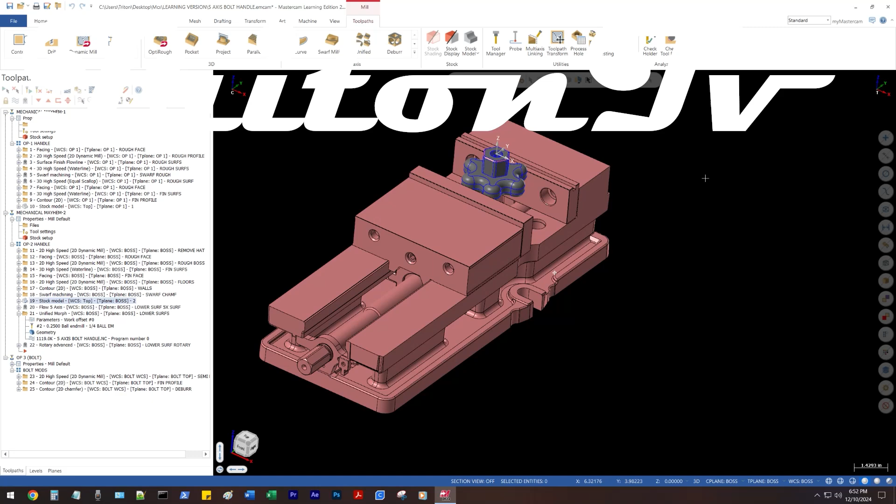Today we are going to be looking at this toolpath right here called Unified Morph. It's quickly becoming one of my favorite multi-axis toolpaths. I want to talk about the setup we have here, some of the settings in the toolpath, and the cool things about this toolpath.

I'm just going to go ahead and play it in backplot. In my last Mastercam video, I didn't say anything, I just did some video, but we'll go ahead and start the sim as well. So I'll start backplot here, and we'll cycle through once, come down, cycle through. I changed a few settings since I recorded that, so there's a setting in here I'll play through and we'll check it out. It's a really cool toolpath.

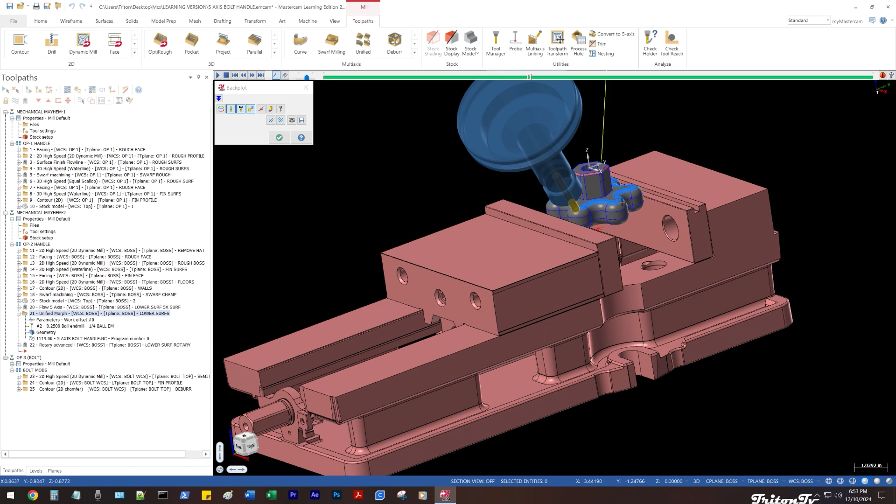In this instance, I'm tilting away from the wall, and I'll show you exactly how I did that. We're also avoiding the vise here, but I noticed that I needed to move the vise down 15 thou in order to correlate with how the part would actually be inside the vise. I'll show you those numbers here in a second.

Let's toolpath finish. So you can see a nice smooth motion coming from the top to bottom. You could argue starting on the bottom is better. This would just be the finishing of those fillets, and this material would be aluminum, so I'm not really worried about quote unquote cutting on the tip.

One thing I'll show you real quick, if we analyze from the bottom of the vise here up to the top, you'll see 1.735. I'll pull up my calculator and type in that number, 1.735 minus 1.625, which is 1 5/8 parallels.

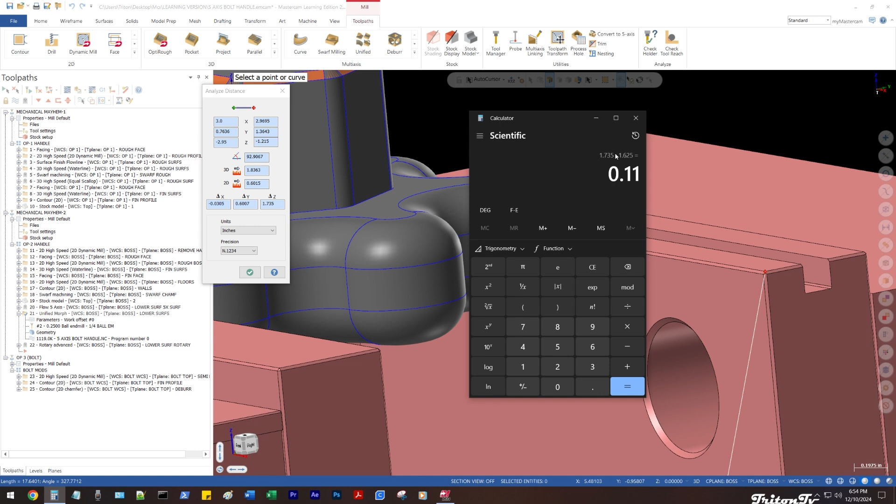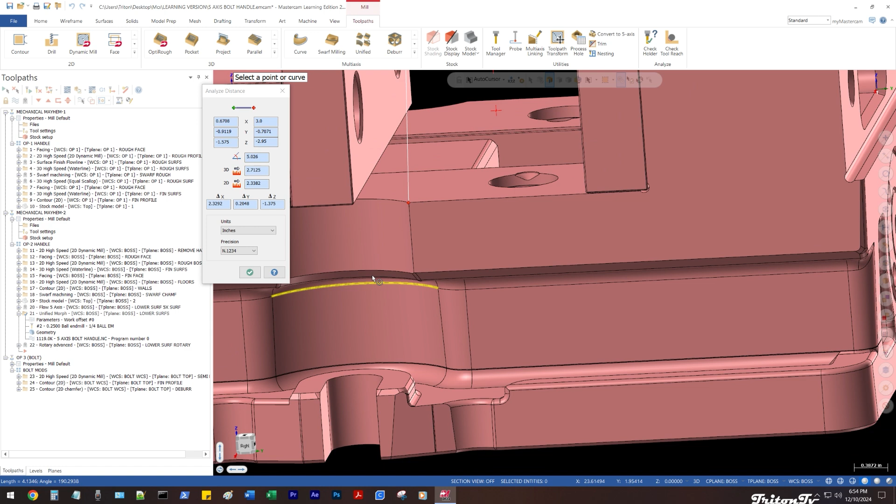We'd be holding onto 110 thou. So if I look at the bottom of the part to the top, I know there's a chamfer, but look at that. Hold on a second here, I'm confusing myself with these numbers. So we needed to measure from here to here. Oh, I think I might have been dyslexic. You get the point.

1.375. Why am I getting confused here? We need to measure from here to there, 1.735. And I think, yeah, okay, I subtracted the wrong number. 1.735. Since we have a 1/4 inch radius, I believe I picked the size that would be, quote unquote, if this was square edges, 3/8 of an inch holding onto the part.

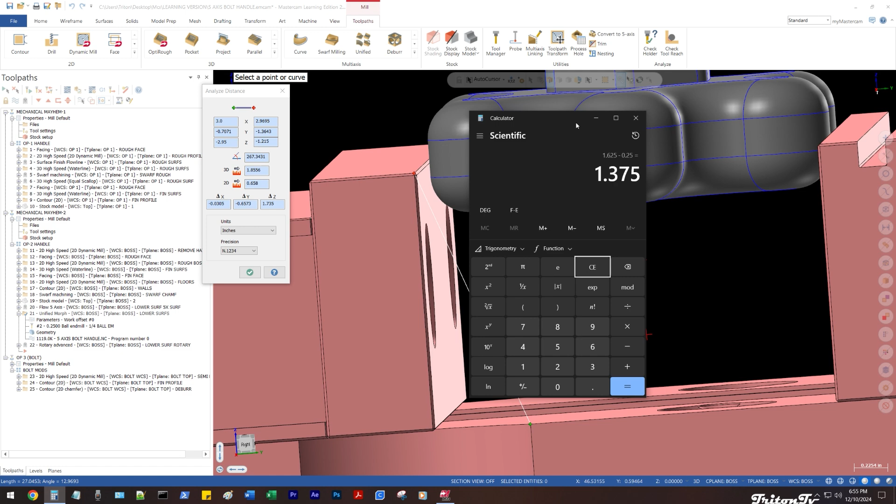So 1 5/8 would be 1/8 of an inch holding onto the part. We need a 1/4 inch shorter than that. So let's just type that in, 1.625 minus 250. 1 and 3/8 would be the size of parallels that we would be using, which would leave us holding onto roughly 360.

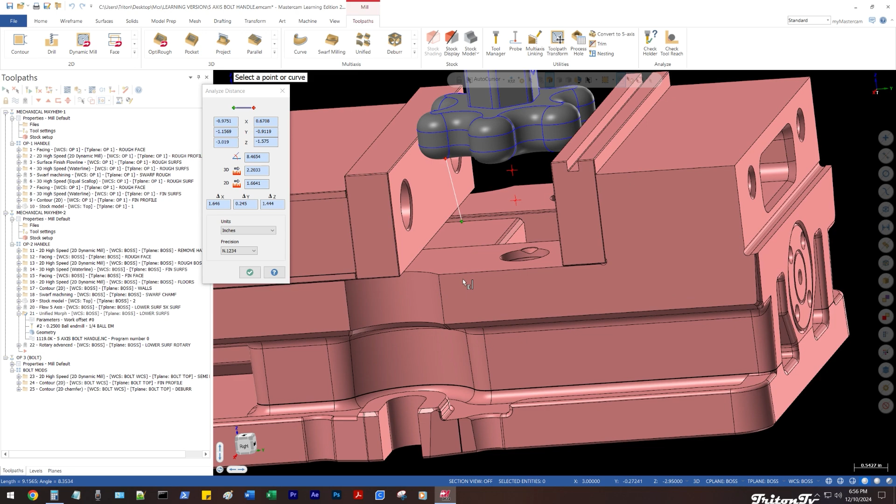And like I said, so if we come down here, measure up here. Oh, measured from the wrong spot. This is turning into a disaster. Yeah, so 1.375 would be the size of the parallels, and that would get us roughly 110 thou. That's the number I was getting. 110 thou of the part where these two tangencies of these arcs, which are in line, would be below the vise. And before that was 15 thou taller or something like that. Didn't mean to spend that much time on that.

But anyway, this is the setup of the part. I moved it down. I noticed in the last video I was only 10 thou away from the vise. It's supposed to be about 20, 25 or whatever.

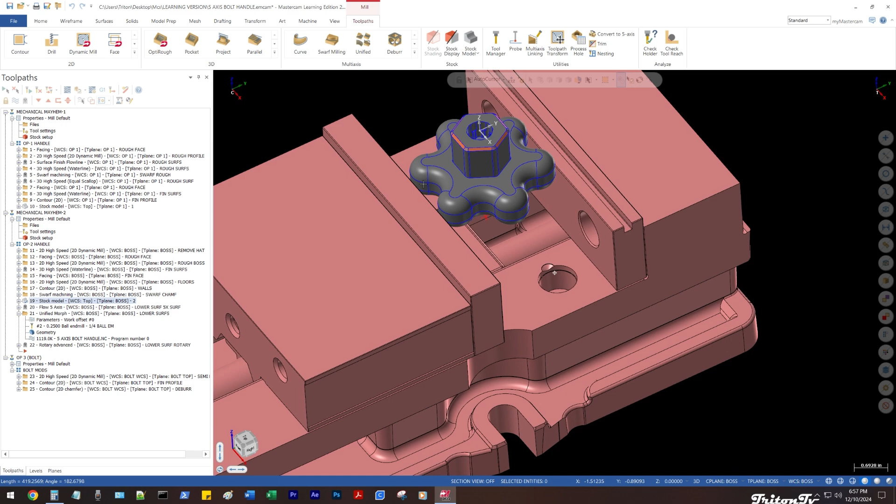So one thing I'll talk about is I made a stock model that takes into account this stock model as the starting condition, and then these toolpaths minus that guy would be what this stock model was made to. It starts here, runs all these toolpaths, and then I have my toolpath display off by default. I don't like seeing the toolpaths unless I'm running backplot. I know that's blasphemy, but that's just the way I like it.

So I will go ahead and push Control T, which does different things depending on if you're in the graphics window or if you're in here in the toolpath manager in your operations. So if I have an operation selected and my mouse is somewhere in the toolpath manager, if I push Control T, it's going to... I think I need to have this on.

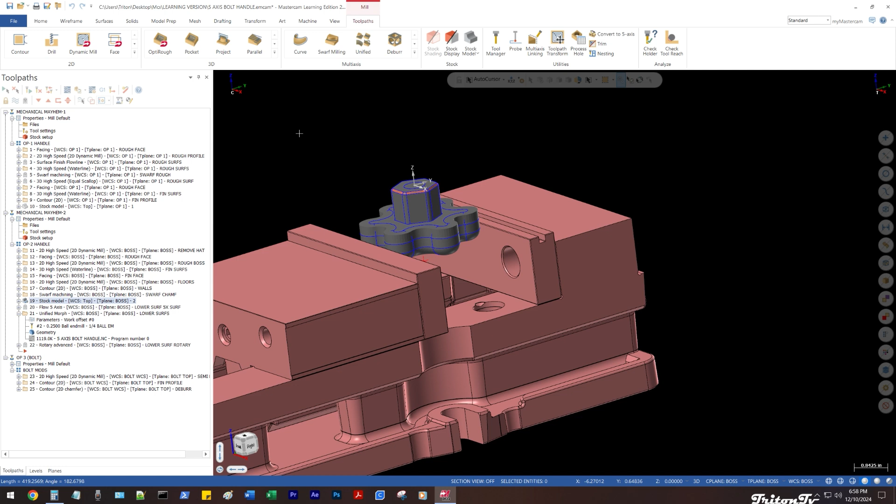So it's going to display the toolpaths. There's also Alt T out in the graphics window, which will turn that on or off. However, since this is restricted to only that one, it's only going to show that. So if I push Control T here to turn that off, Alt T up here... of course it acts funny, this has always been kind of bugged. Whatever, you get the point. This gray thing here is the stock model after all of these. Oh, there we go, that's why it's doing that. That makes sense, I'm not used to having this setting on. I hate toolpaths. There we go.

So now we have restrict display only selected toolpaths on, and then when I click on a thing, it'll show the toolpath. I don't like that, so I come out here and push Alt T, but when I click on the stock model, for some reason that's the one toolpath that will still display with Alt T. It's such a weird modality between toolpaths being on and off. I guess stock models have a high priority. Sorry to go off on all these tangents. Anyway, that is the condition that I start with this toolpath. So I'm going to go ahead and turn this off again by pushing Control T.

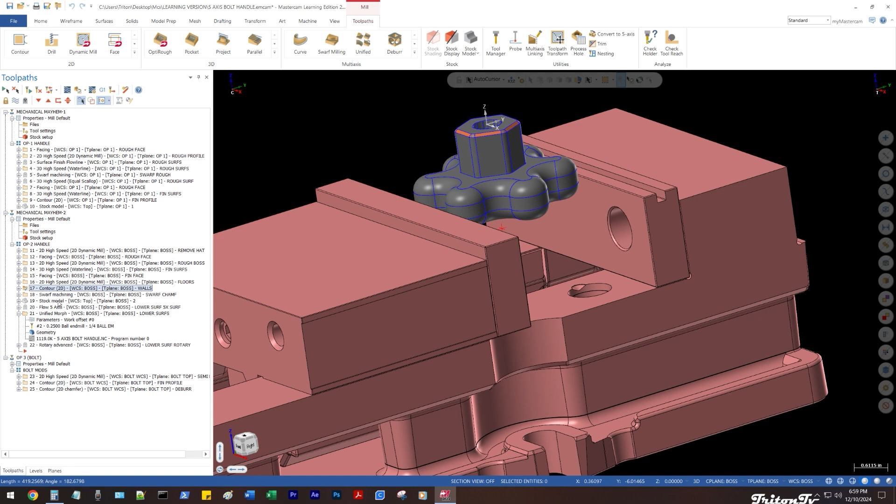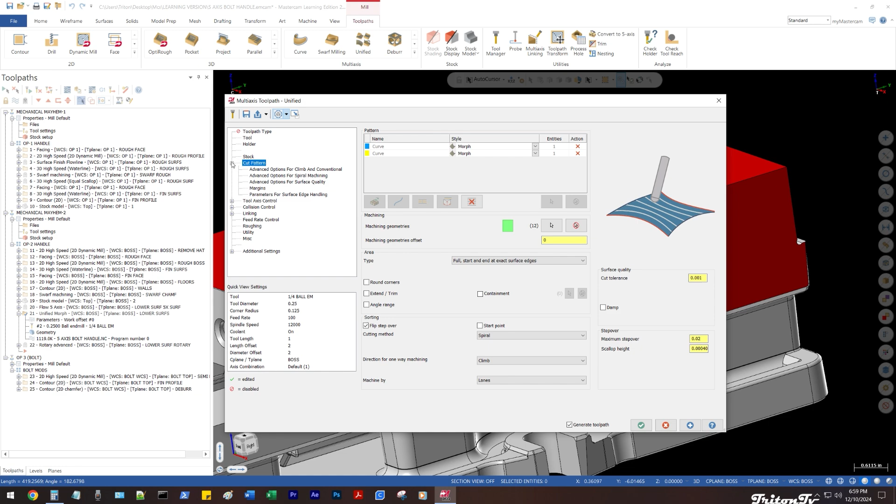And also when I click on toolpaths, they're gone. So if we go into the Unified Morph toolpath and we click on the parameters, I'm going to show you. So we have our tool selected, our speeds and feeds, blah blah blah, comment. I have a holder with a certain stick out. This is actually, I just picked a holder. This holder actually looks like it's too big for this machine that I have selected, but whatever, I don't care about that. So I'll go ahead and scoot this over up in the corner here.

I'll zoom out a little, and you can kind of see any multi-axis toolpath or some 3D toolpaths will color code things once you're in the geometry menu. So we'll make note of a few things. The machining geometries I picked, I just wanted these surfaces down here, so I went ahead and picked those. And I gave it morph curves.

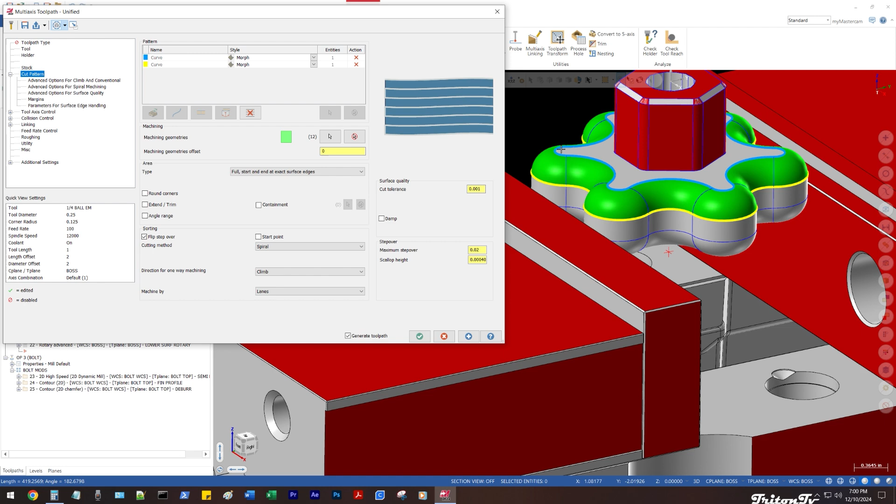If you're unfamiliar with what morph curve actually means, there's this mysticism around it, but it basically just means you're taking the toolpath and starting with, in this instance, the blue curve, and ending with the yellow curve. You are morphing how the tool goes along your machining geometries, or drive surfaces as a lot of the surfacing toolpaths call it. You're morphing the toolpath from here down to there, taking this curve and eventually ending up with that curve. So from the top, what you end up with is a nice toolpath that blends in with the shape of the top curve and the bottom, which is basically what Morph toolpath does.

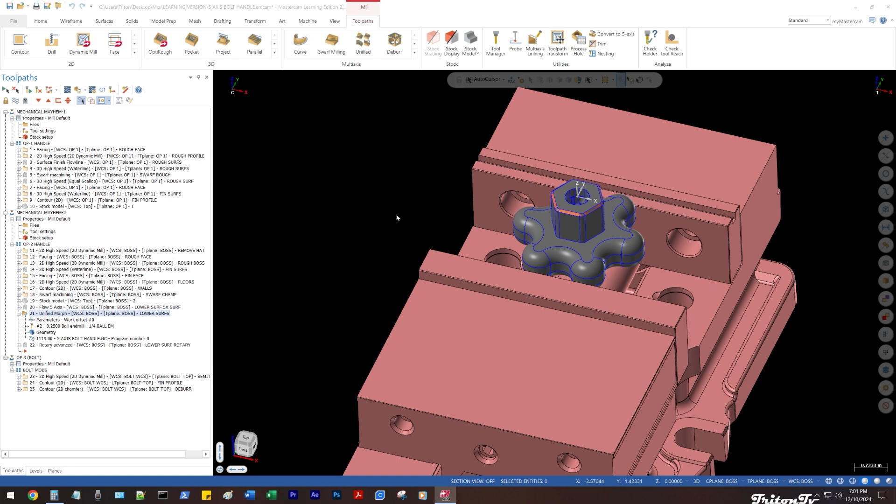So anyway, I'll turn the holder back on. We'll go back into the parameters here. So as you can see, we'll go back to the cut pattern, so we have our geometry here, and then there's a few settings on here. We're just doing a spiral, which will get you a nice smooth toolpath, as long as you get everything right and it's reading the surface well, it should get you nice smooth motion. What is the other toolpath? Waterline will also do that, and equal scallop if you get everything right.

Sometimes surfaces and solids get weird. So anyway, this is the default, I think. NX calls this in-tol and out-tol. This is basically a profile, if you will, of 1 thou which is what the tool is allowed to follow on this surface, and I think I gave it a step over of 20. I played around with the step over. I like these toolpaths because they update live, so if you enter 25, it updates the scallop, which is pretty cool. That's a relationship between the step over and the radius of the tool. So anyway, we're gonna have a 4/10 scallop, we're doing spiral, and then now we'll get into some of the funner stuff. So let's see here.

This is the setting that I changed to get the tool to actually do climb cutting all the way around the part. Depending on how it reads the surface and the concavity and convexity, it'll generate a toolpath in a direction, and if you turn this on, it'll actually look at where the tool is contacting the part and what direction it needs to move in order to be climb cutting or conventional cutting, depending on what you told it here. So I told it climb cutting here.

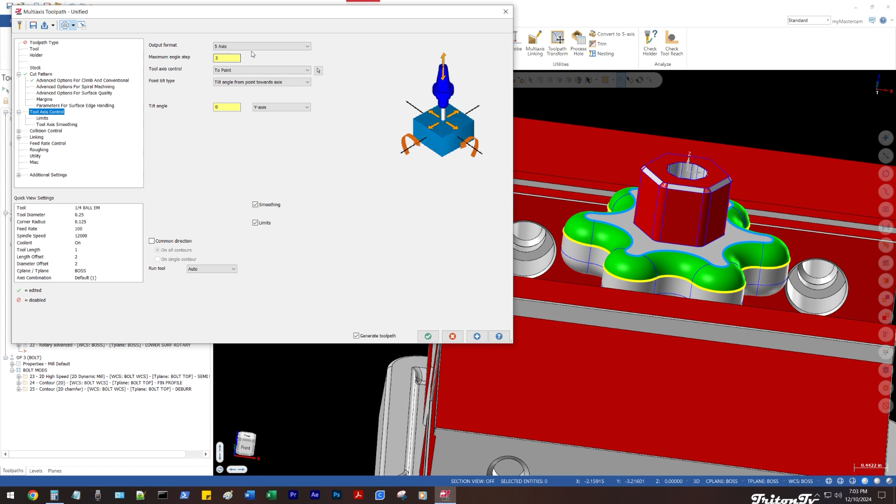So we're outputting 5-axis movements. Angle step is 3, meaning the max change between motions would be 3 degrees. And this is the kicker here: tool axis control. There's tons of settings here.

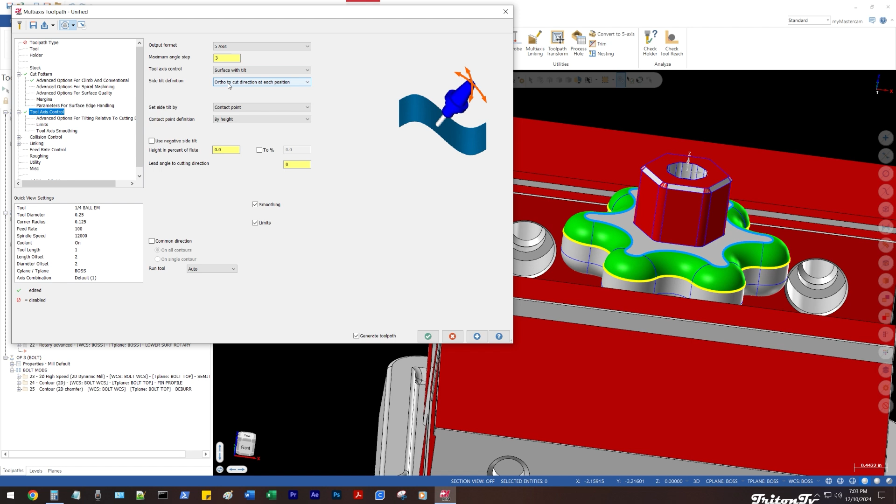Surface is kind of like normal to a surface at the point at which it's at. Surface with tilt, you can give it tilt. Angle towards tilt axis, you can give it an angle and tell which axis to tilt towards, depending on if you're on an A axis or B axis machine. That would make sense there.

Fixed angle to axis, I don't know if I've messed with that one, but the one that we used, I'm going to exit out and come back in just so I haven't changed anything. The one that we used is To Point. So To Point is a really cool setting. To and from are pretty cool. So as you can see by the graphics here,

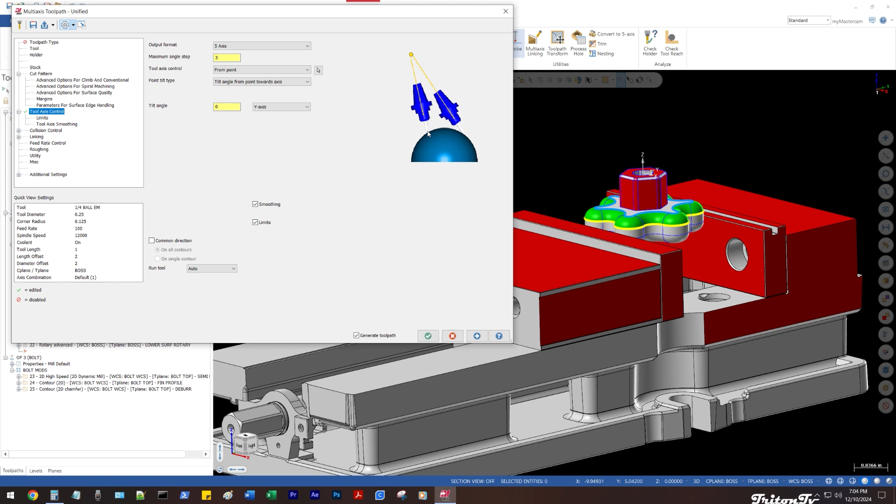the spindle orientation will be pointed straight at the point when you're going to point. From point is the exact opposite, right? You are the top of the spindle is pointing up towards. So in order to get what you want on that one, let me think about this. I don't know if you can get it.

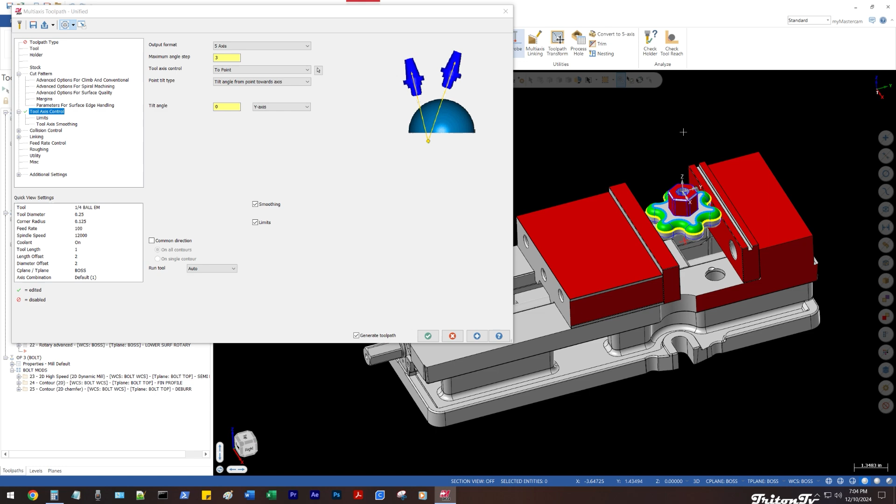Yeah, like this point here when I'm doing to point, I don't think you can do it with from point because it would basically be a chain like this out in space. So not one single point would get you the axis that you wanted. So to point was the thing that I tried here.

And I think initially I had selected this point, which is 2 inches. I just picked a number. I went to create point position, and not sure if many people know this still, but if you start typing in numbers in pretty much any create geometry function, it'll automatically—this is old school Mastercam, it's kind of like AutoCAD. If I type in 0, 0, and then minus 3.333, it's going to place a point at that position. So it's a really quick way to create geometry. And that's what I did.

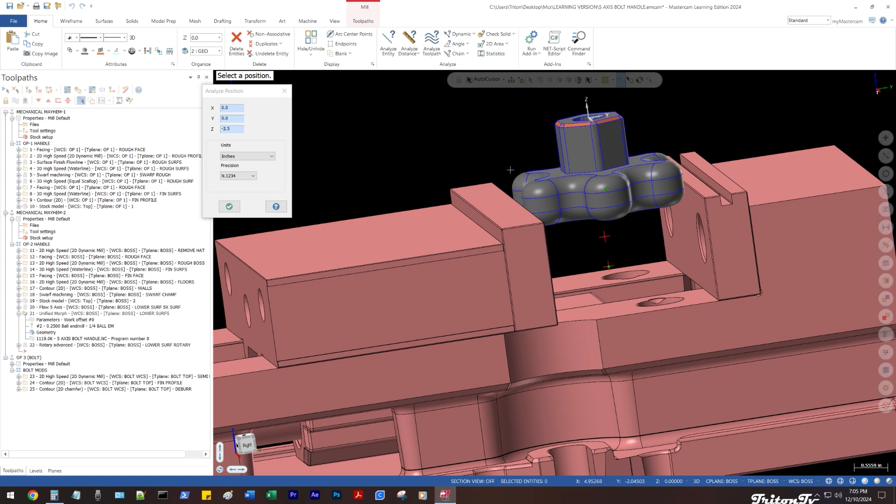I just picked 2 inches at first, ran the toolpath. And then I actually wanted the tool—let's think about this here. So if our point is closer to the part, the angle orientation of the tool will be, let's see, either closer to the part or further away. Let's think about this. Let's look at the part.

Actually, let's do this—let's just look at the solid and these 2 points. Okay, so let's see, if we look at the point orthogonal, if you will, to the part, this would be our axis at this point, and then we basically would be looking at it. So if the point goes further away, let's see—we're actually tilting towards the part. Yeah, anyway, so I played with that and got the angle that I wanted.

And in this instance, we don't have a tilt angle. I think this machine is an A-axis machine, so this is probably set wrong, but there's no tilt, so we're not gonna worry about it.

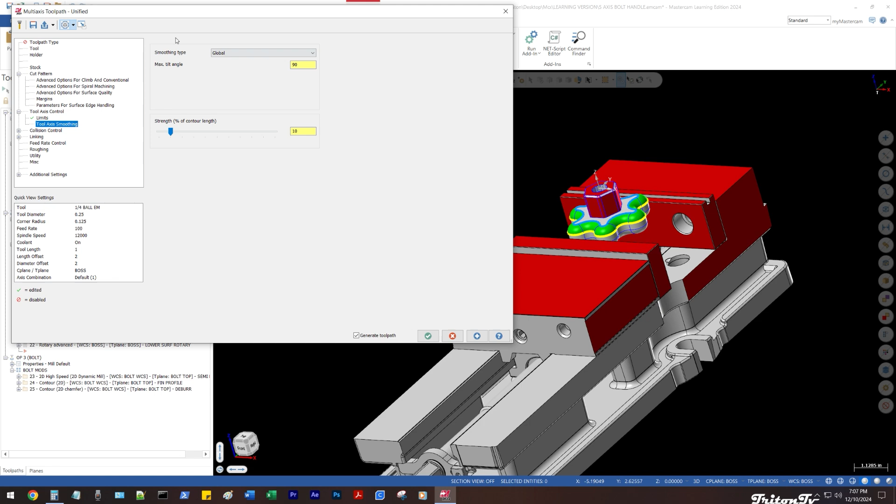Limits are pretty cool. I've messed around with limits in Unified. If you just kind of know what you're comfortable with, if you're in a B-axis machine, I believe it would be this one here, and you can click on it and it'll kind of show Z is up in that direction, X is here. You can limit it, and I did set numbers here, but we have it off. So these are the numbers that I was comfortable with. Comes in handy when you're trying to avoid things, and you can basically get the toolpath to avoid things just based off of where you limit the angle. This is default settings, I believe.

Collision control—this is where you get into some of the settings that will help trim the toolpath or tilt the tool, depending on what you tell it to do.

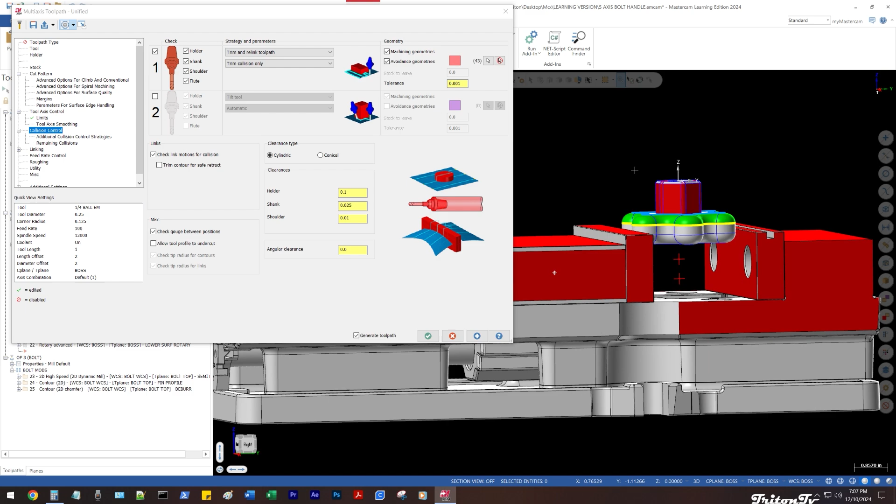In this instance, I got lucky, although we do have these set. You can see the machining geometries in green, and the avoidance geometries are in red. Basically, I just wanted to avoid the top of the vise and the sides, depending on how far we got tilted there, and this boss as well.

I don't think with the way we did from point, we'd actually get an angle to where we would touch this. However, it's nice to pick vertical things that would be in the way of the toolpath, and you can get the toolpath to tilt. So you can just tilt.

In this instance, I left it on trim and relink. So you'll see if you get a bunch of relinked motions, you'll know that this has been active in your toolpath. Some settings here: 0.1 from the holder, 0.025 from the shank, 0.01 from the shoulder.

And then this is kind of cool. You can just say, hey, instead of all this, I just need an angular clearance. Actually, I think it works in conjunction with these two. A lot of settings in this toolpath, so there's other things you can do here.

Let's see, I think I left these on default. Get a nice lead in, lead out. These can come in handy, like if there are a bunch of retracts, you can set, I'm thinking of a different toolpath, where you can set the linking shape to sphere or whatever.

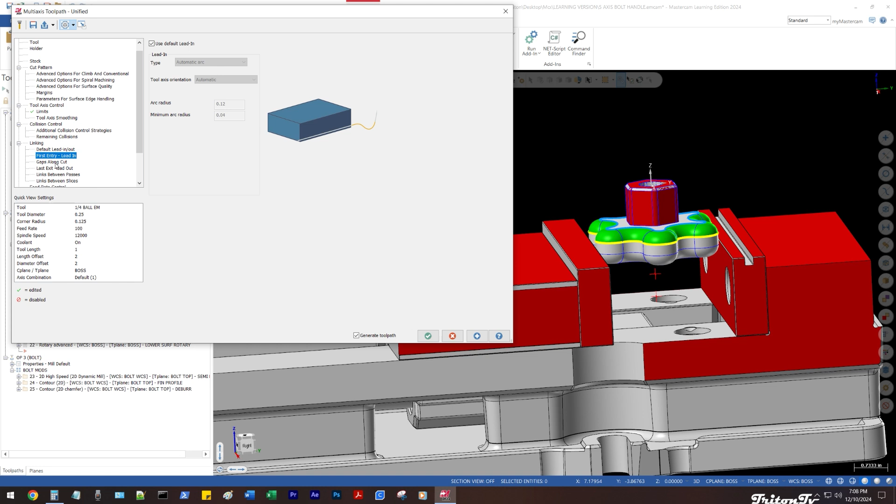Where is this at here? Yeah, I'm thinking of, I think one of the other tools, swarf is what I'm thinking of.

So anyway, that's basically what I did with this toolpath. I selected the faces that I wanted to cut, and then I gave it these nice morph curves. It was spitting out a decent tool.

Instead of calling it unified morph, this toolpath is basically a conjunction of multiple toolpaths between morph, project, guide, and I think there's one or two others, flow. It's like all those toolpaths in one.

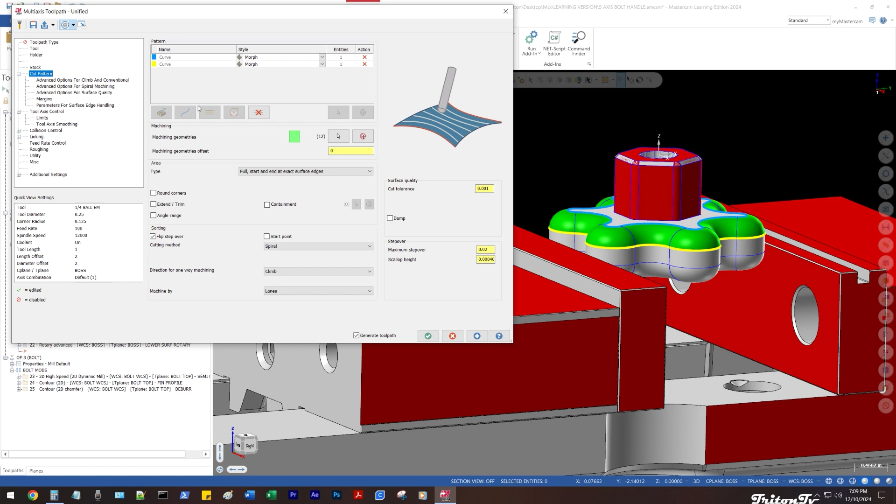If you don't have anything selected up here, it's going to call the toolpath unified automatic, and then it'll do automatic strategies for how to blend the curve. So there's instances where you probably end up with the exact same toolpath by selecting different things, depending on how you tell it to do the axis of the tool.

I thought I gave it this stock, but I guess not. The main benefit of having a stock model right before this toolpath is I can do something like this. I can go into my levels manager and just turn on the solid and the geometry, turn off the vise, turn off the surfaces that I drew.

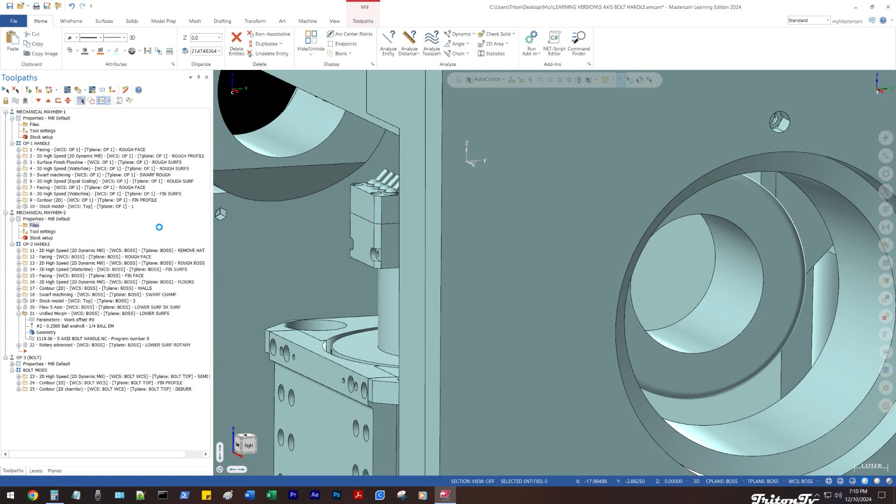There's two ways to get into the settings that I'm going to show you now. You can either go to Files, and it's going to open up the menu with stock setup, machine, master model, stock setup, work holding tools, and simulation, or I can go to machine and click on simulator. This will take me straight to the machine sim page, but it's down here, so you'd get there anyway.

In this instance, we have the default Hermle machine selected. Just one thing to note, there's a pretty good naming convention on. So we have vertical milling center, and then we have AC for an A axis and C axis machine. So these things do follow a convention. Anyway, that's the machine we have selected.

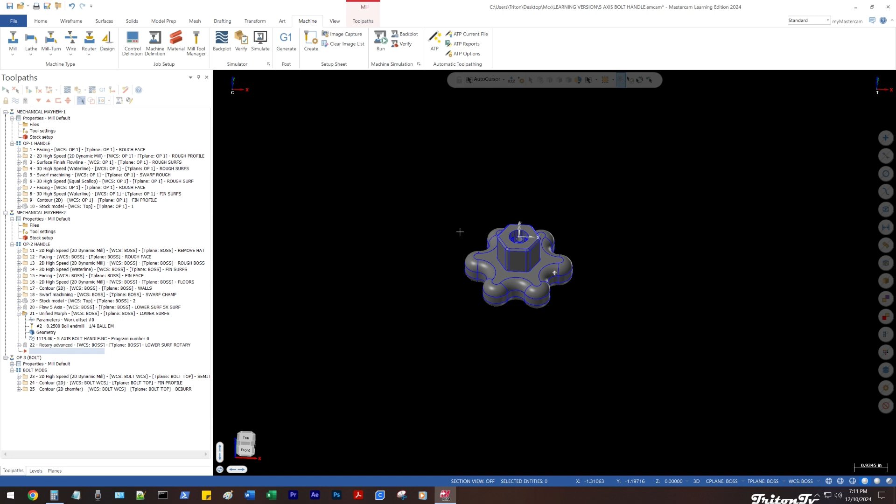The other thing to note here is I actually did have to move the part to get it to simulate properly, and that's something that takes a little tinkering with. What that has to do with is typically the orientation of your machining plane that you choose. In this instance, I'm using a custom plane that I called boss.

I'll go ahead and select all of the planes that I have created. Actually, we're going to turn off the bolt ones because those are for the bolt. So you can see these planes here.

And then if I click Alt, or if I click F9, you can see where the top plane is and this other plane. So let's go ahead and go to the top plane here. Yeah, you can see the top plane is actually orientated 180 degrees about Y, I guess you could say, or X. The part is rotated completely around.

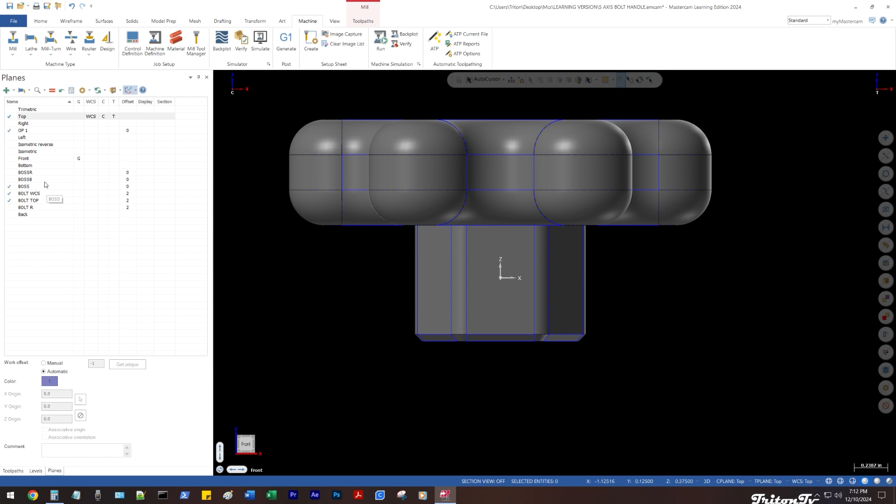And it's also translated some distance in Z, which is 450 thou. So if I go to our boss off plane and look at the part, you can see our Z is 450. Now let's go back to the sim.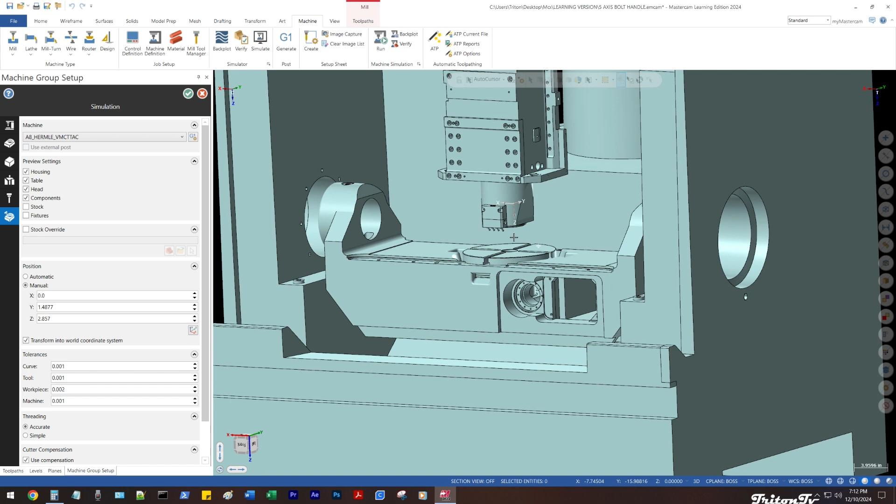This is something that drives me crazy at work and here. Sometimes you just have to play with it, and sometimes it doesn't make logical sense. It has to do with how this machine is set up, and I think since we don't have the right machine definition and whatnot, that's also part of the problem here. So anyway, I'll show you what this looks like in the sim.

So I'm just going to have my model and wireframe geometry selected. One more thing, actually. So in the work holding tab, I have my level 31 vice setup, and you can see it's the Op2 Kurt DX6 vice. So we have that selected.

So there's a button in the simulator that'll turn this on and off, and it won't be checking, it won't be making a 3D representation of the toolpath where it's removed stock, like in NX, it's called the IPW. It doesn't do something like that. It just is for visual representation and crash simulation.

So yeah, so we have that all set up. Let's go ahead and jump into the simulator. I know this is kind of all over the place, but this is kind of how programming works. You think of things and do things in a setup. Oh, sorry, one more thing.

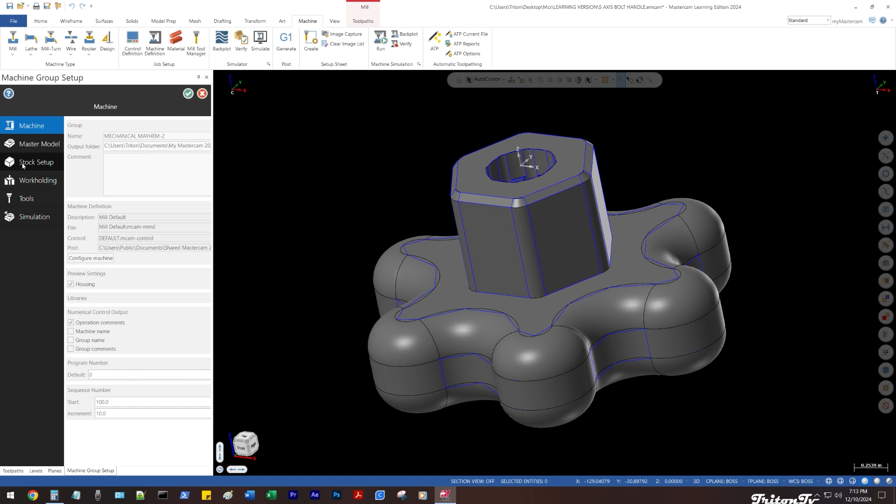I swear. So at this instance, my stock setup is actually a mesh, and you can see it on screen now. And what this mesh is, this mesh was actually created from, yeah, so this mesh was created from, I'll show you here. Let's see, you start with this stock model, and then you run these toolpaths.

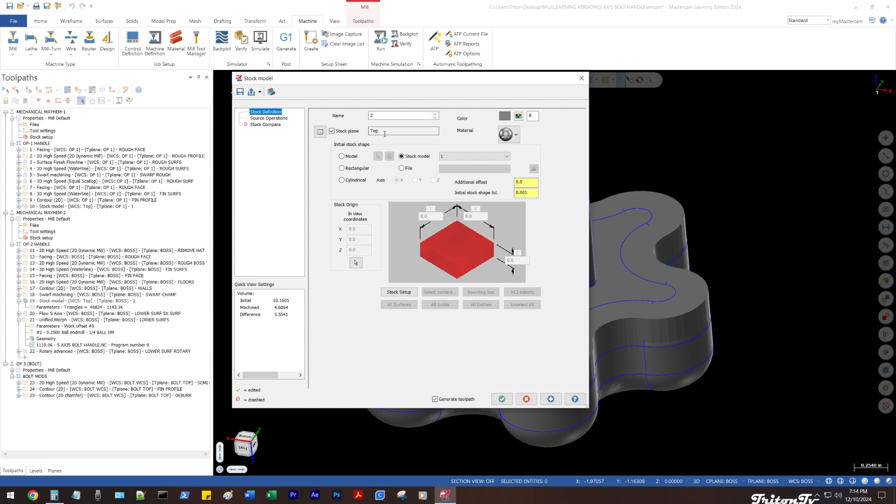And then when you do stock model, you can, I can't remember. I created a mesh based off of this stock model though. I'm trying to think of how I did that actually. Let's see. Up on source. Give me a second here. Up to stock. I don't think it's a real entity. Like it's not in my levels list.

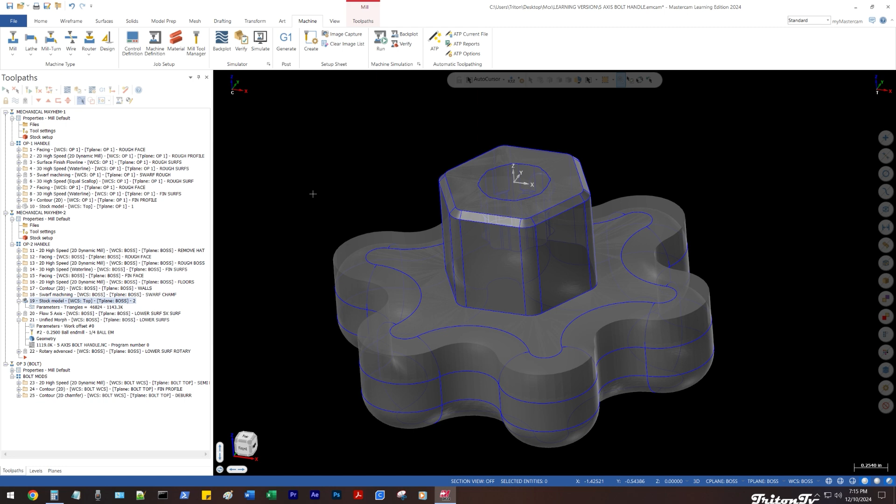Yeah, I'm getting things mixed up between different softwares right now. So yeah, this mesh here was created from, let's see if I can remember where I did this. Add from a selection. I don't remember how I did this, but I created it from that stock model setup is how I got that. Because this stock model, let's see, let's do this, is not selectable, right? Because the stock model is actually a toolpath.

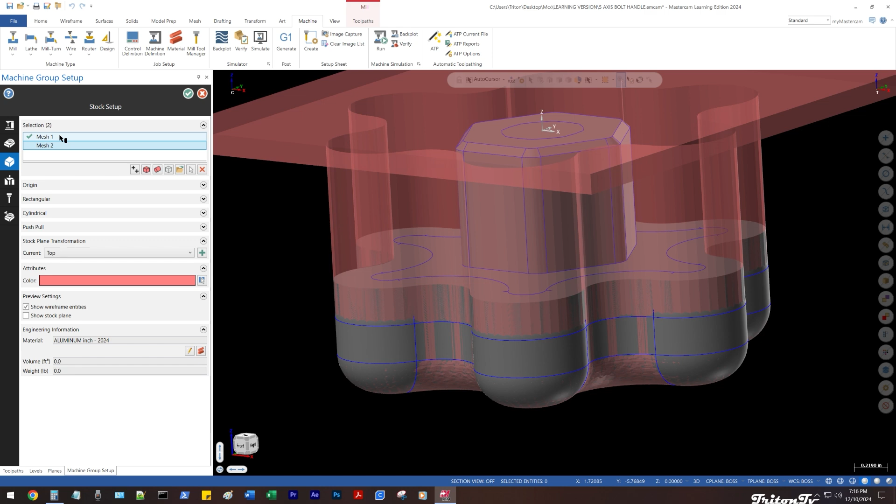So I can select the part and the wireframe, but this thing is not selectable. So you can make it in the stock setup. But anyway, when you go back to stock setup, you can click on different stock models and solid models that you've made for stock, and you can make them the active ones. So in this instance, now that I've gone through those toolpaths, I made this mesh the active thing. Yeah, it's basically a ghost entity. It's not a real thing. I'll have to think about how I made that.

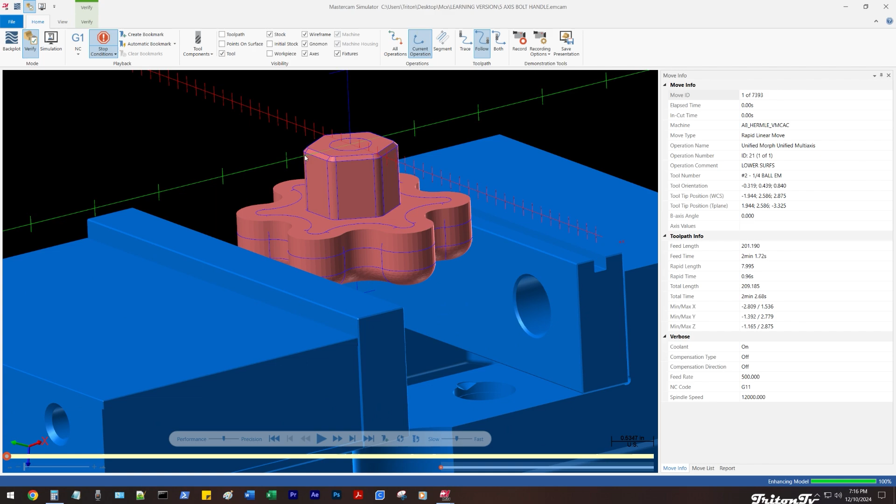So anyway, when we run our, let's go into the simulator here. So when we run our sim, in this instance, it's going to start and verify, which is very similar to the sim, except it's not going to pull in the machine and all that stuff. You can see our initial stock setup is the same as the stock model, right? And then our workpiece is still under there, under the part.

I think the colors are doing something weird right now. I don't know if this should be red. Anyway, so we're going to turn on the stock, and then we're going to, I'll just run it real quick through verify.

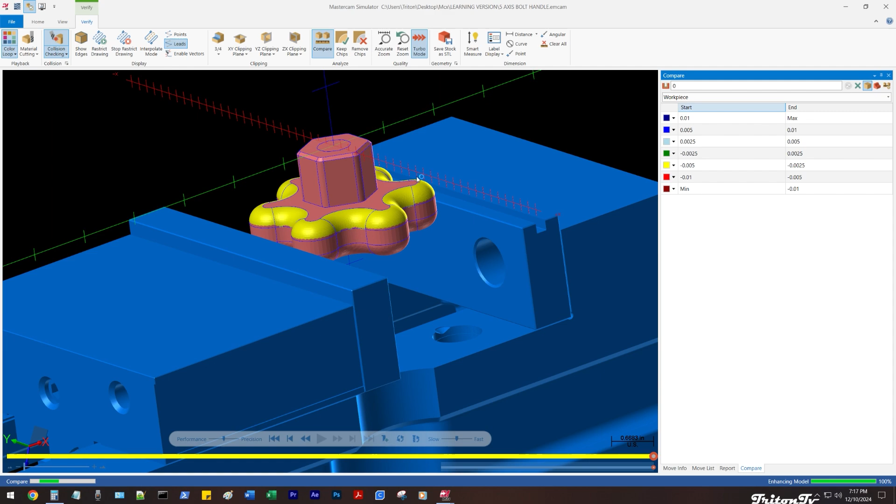There we go. If I want to compare, I'll click on compare, run that with the tolerances I've set, and then you can see we've machined all the green stuff, and we still have this pocket here and this threaded hole on the side of the part. So I'm going to go ahead and turn off compare. And now we can go to the sim.

And so this is where that tweaking with the position of the part will come in handy. And it's a little bit easier when you pick a normal toolpath. But once you get it right, it works for all the toolpaths in that setup.

So I think I used this initial toolpath to get this figured out. Go ahead and pull this back up. You have to tweak your fixturing and whatnot to get it where it needs to be on the machine.

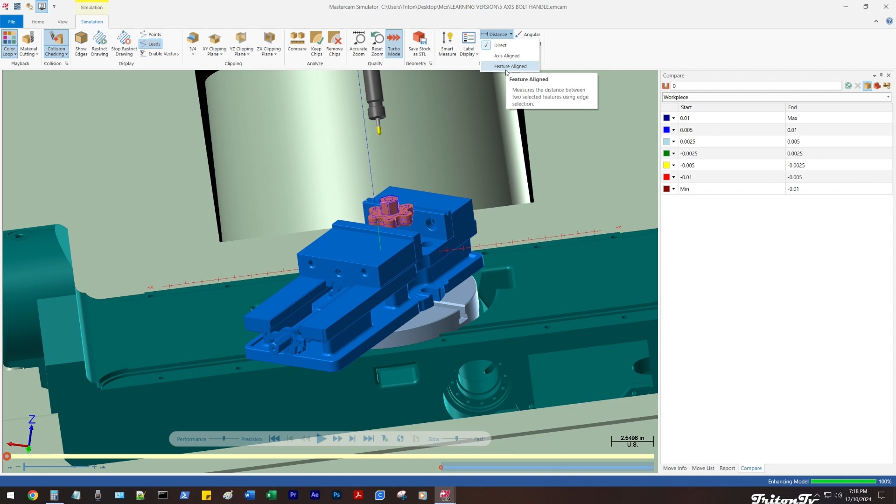One cool thing I've learned recently is you can actually measure inside the simulator. So you can check the distance from here to there using this axis-aligned feature. The cool thing is, whether it's from something fixed or moving on the machine, the part, or the fixture to a tool, when you step through it will update these values on the fly. It looks like our X and Y aren't moving, but our Z is. Pretty cool. Once you want to get rid of it, you just click clear all.

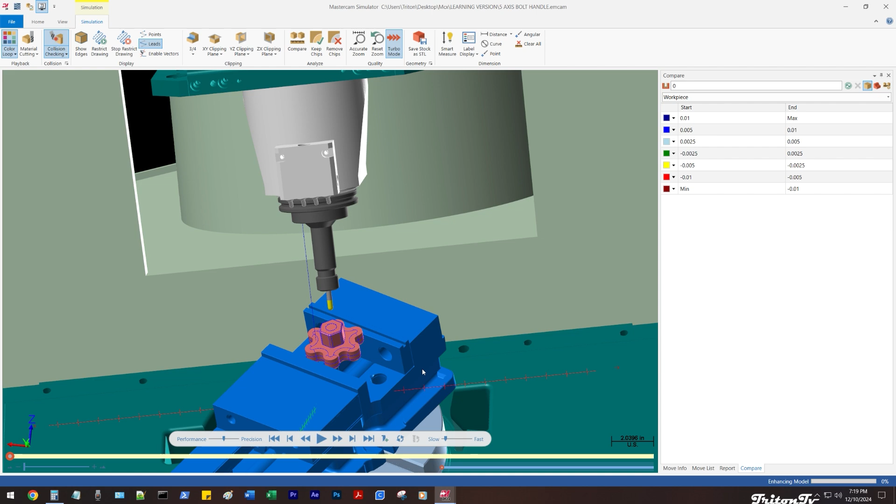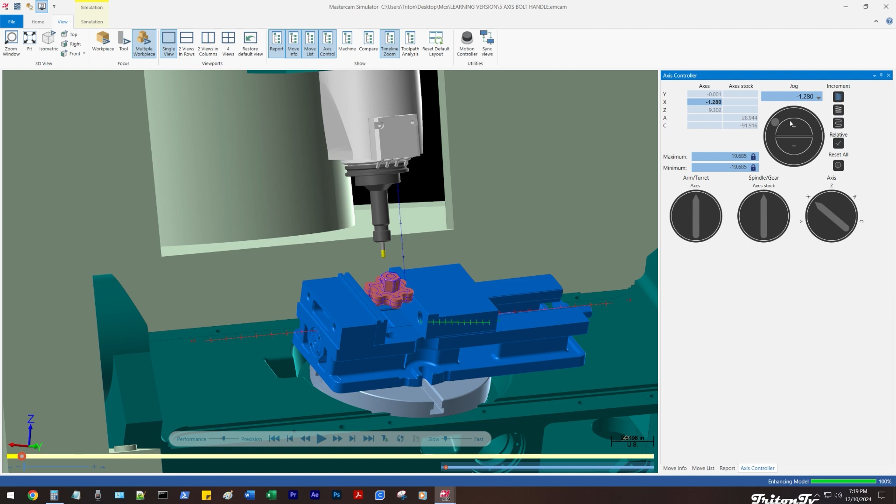So we'll just go ahead and step through this. I'll slow it down a little bit. There are so many cool things you can do that I don't think a lot of people take advantage of. Like, you can come over here and say, oh, I want to see what it looks like when I move the Z value up, or the Y value, or X, whatever. Then when I click step, it'll step through and automatically move the tool back to exactly where it was. There's a lot of really cool things you can do with the simulator. You could see this number here — I think it'll let you edit these.

Like right now at work, I'm working on a part that has lathing and multi-axis toolpaths all in one. So I have a lathe machine group and a mill machine group, different stock setups for each, and all this stuff. I've been learning really cool things about the simulator here. What else is a cool feature?

Yeah, so compare — we already know how to use that. That'll also turn on when you click this. You can see compare is turned on. So let's turn that off.

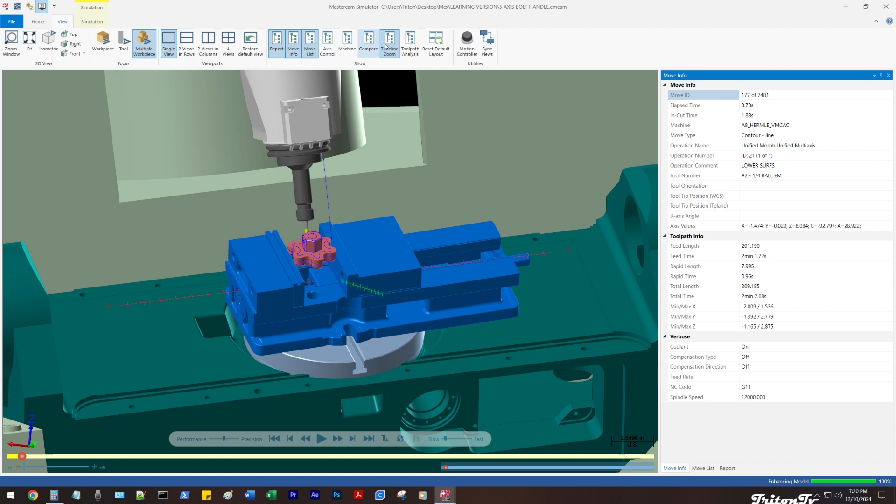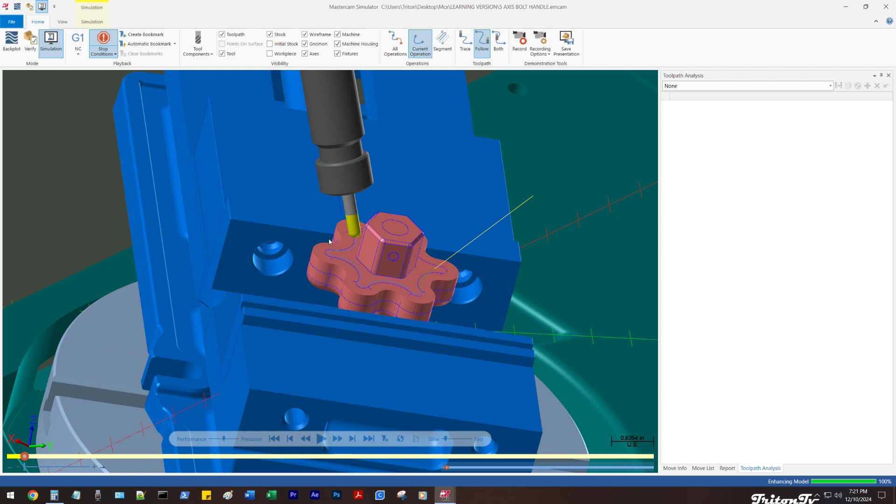The toolpath analysis is pretty cool. If I turn the toolpath on, hopefully it behaves — it was acting weird. Yeah, so we can see the few lines we've drawn on the toolpath here. We're following the tool, so we're only drawing from the start to where we are. If I step through a little bit, you can see more of the toolpath. Let's let it do one full rotation here. Okay, we'll stop it there.

When you add a filter to the toolpath analysis, it will color the toolpath. So if I had all my toolpaths right now and clicked on operation — and this is the operation we're running — you have all these different options for the colors. It's pretty cool. I don't know if you needed to look at this, but you can also look at tools as a filter. Feed rate is pretty neat.

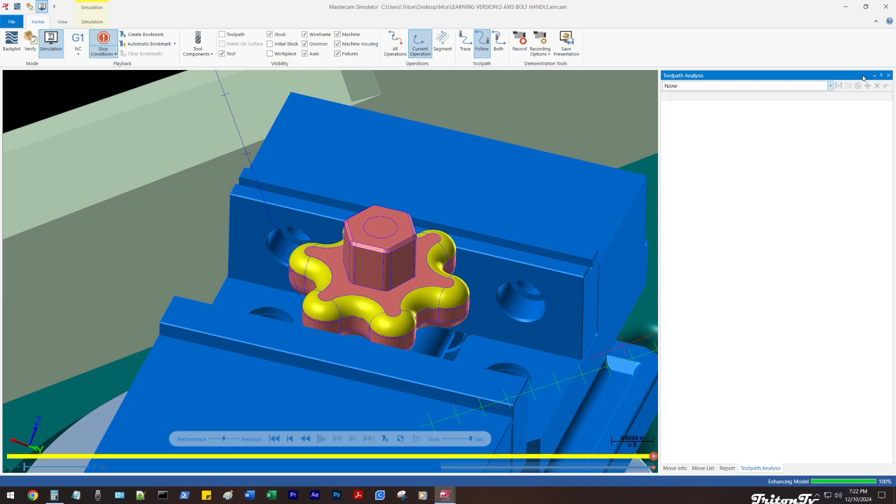It'll tell you if it's cutting motion or rapid retract. So if I go all the way through, let's let it get through. I don't know if it's working right now. Whatever — you can see the difference here. Segment length, blah blah blah. All kinds of cool little filters you can add to that. So let's turn the toolpath off and get out of the toolpath analysis.

Let's see — in my last video I showed, I turned on these two views.

Each view is modal, so I can move this, move that, and they're going to be updated when the tool moves. We're at the end of the toolpath. You can see you can do all kinds of cool stuff.

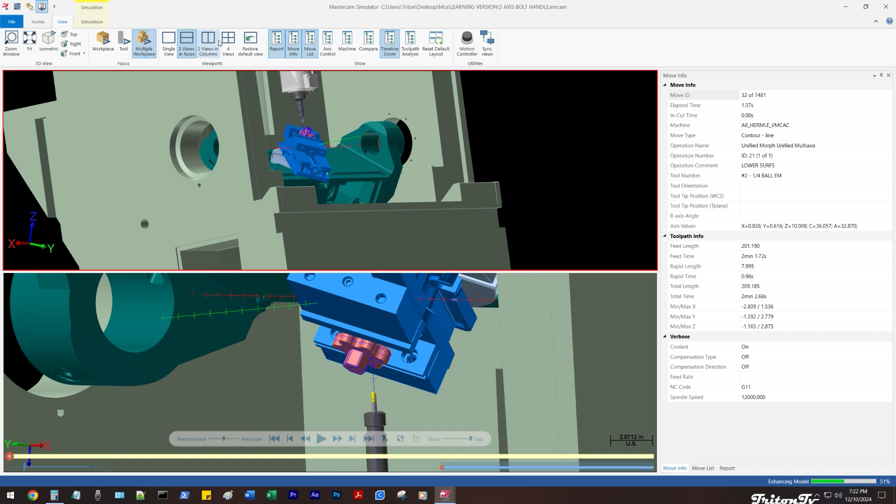You can do 4 views, if you're really trying to look at stuff, and each one of these has its own measuring capability. It highlights in all of them. There's a lot of really cool stuff you can do with the simulator as far as double checking things, but that gets a little busy really quick.

A couple more things. Let's turn off this distance thing. I don't want to measure here. We'll do this, there we go, we'll just clear that. Let's see here. So view, this is kind of cool.

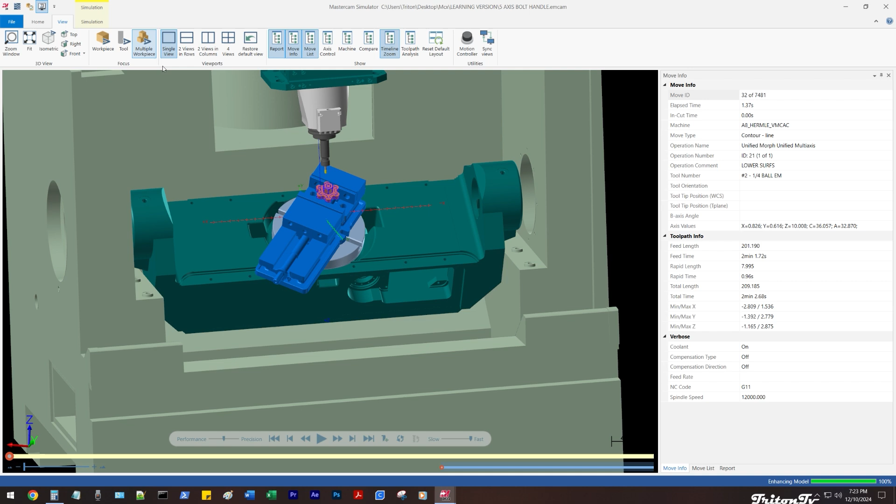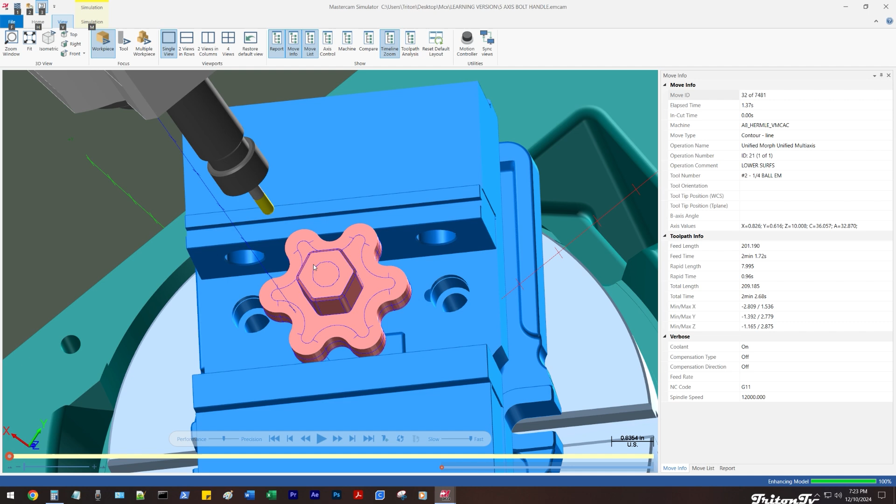Typically when you have a setup with a bunch of things, you're going to be in this multiple workpiece view. So if I click Alt and 1 to go to my top view, you'll notice we're actually at the bottom of the part, and I think that's because the initial top view was facing the other direction. But if we go to workpiece and click Alt plus T, it's actually going to give me the perpendicular top view in relation to where we are. So if I step through, we're already at the end of the toolpath, or no.

Yeah, this gets weird quick, so let's slow this down. If we're in the workpiece view and we let it run through a toolpath, the view is as if the workpiece isn't moving and everything else is moving around it. It's really weird. It can kind of help you get your bearings initially, but it's not reality. So I don't like that one.

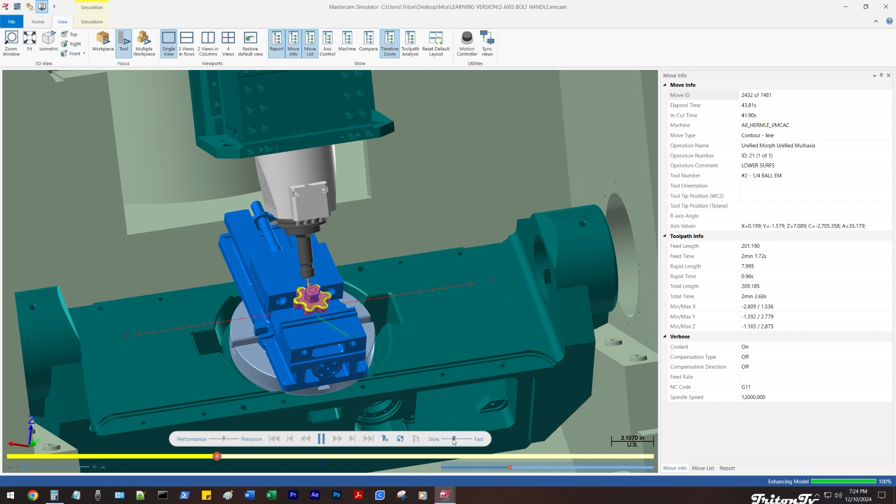And then the tool view is very similar, where it'll basically give a nice view in relation to the tool. You can kind of see it's going to be basically the same as the multiple workpiece, but in relation to the tool. So a little bit of differences there.

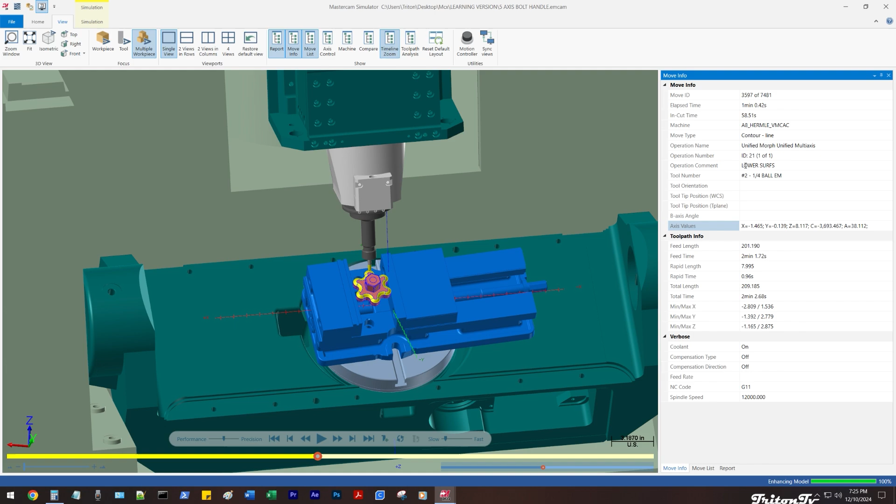Yeah, there's all kinds of stuff over here. You can look at some code and whatnot. Let's see here. You can see our live X, Y, Z, C, A directions here, operation comment, blah blah blah blah blah.

So I just wanted to show some cool stuff with this toolpath, the simulator, just kind of test out my new setup with the microphone and whatnot. I believe that the Mastercam simulator, or any 3D machine sim of toolpaths, comes in really, really handy when it comes to these cool toolpaths where you're moving the tool in all kinds of directions.

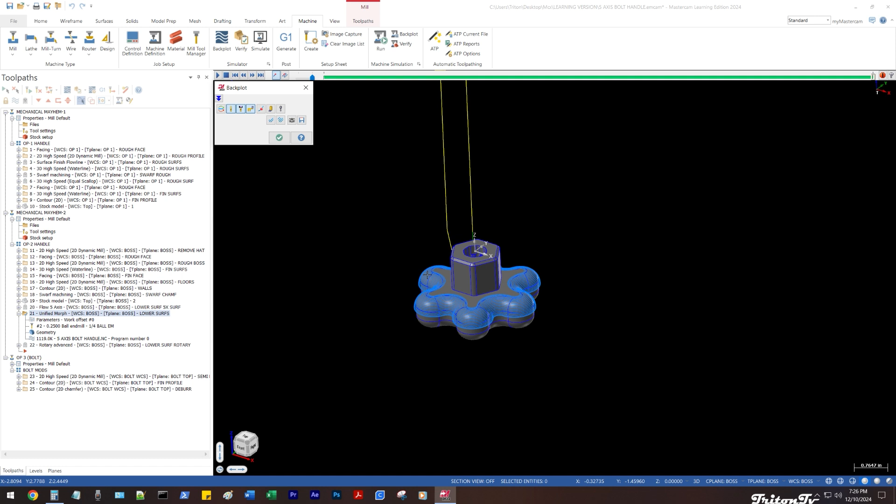Because if I get out of the sim and click on this toolpath and just let it run through, you can see that all we're seeing is how the tool moves in relation to the part, right? Because our view, our perspective isn't changing, the tool is changing. So sometimes it's hard to wrap your head around what the machine is actually going to do with some of these crazy toolpaths. In this instance, Unified is just a really cool toolpath that has a bunch of different functionality.

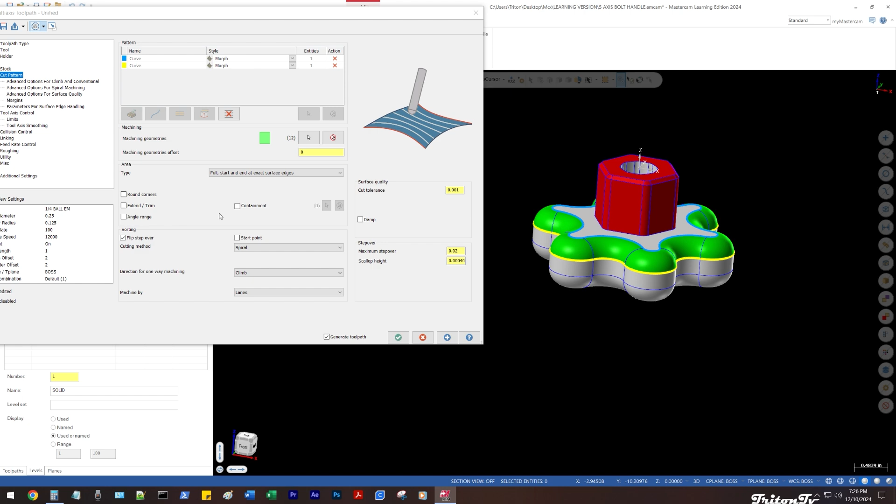So yeah, just kind of wanted to talk about this toolpath, talk about the simulator, show some settings. We'll zoom out here, go back and turn on the op2 vice, and then I'll show you op1 vice, blah blah blah. And that's actually the reason why op1 and op2 are in different machine groups - it allows you to get different setups with different fixturing and whatnot.

And that's where the need for stock models kind of came in. I avoid them unless I really need them, but in this instance, if you're doing this, you kind of need them to start with where you left off without having to draw all this custom stuff. And then I'll show you an op3 setup that I was working on and programmed, which will be maybe one of the next videos.

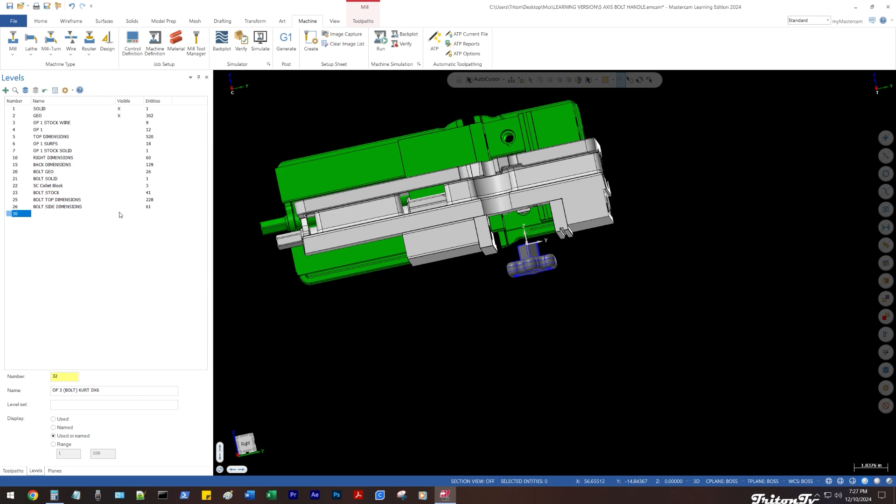So we're going to turn off op1 and op2 vice. We're going to come over to op3. Op3 is actually the bolt, so we're going to turn on the bolt geometry, bolt solid, turn off this and that. And then I downloaded a 5C collet block. We're going to go ahead and turn on the planes for this, so it's going to be bolt WCS and bolt top.

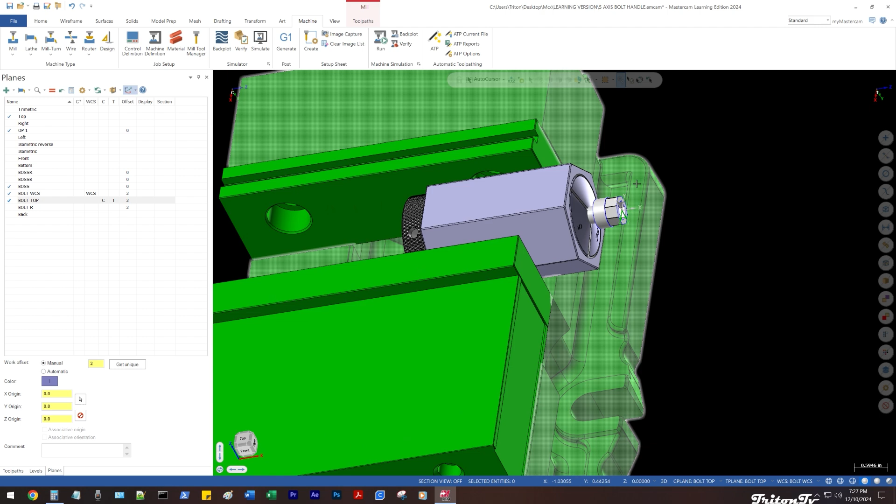This is a good time to talk about 3+2 planes and whatnot. So if we look at the bolt WCS, this is kind of how you'd set it up in the machine. In this instance, I have the 5C collet clamped right there and the parts sticking out over here.

We'll turn on the bolt stock. So this was an actual part that I made, and I did modify both the bolt and the handle. The handle was made from scratch, and the bolt was just a modified bolt that came with my 5-axis mill.

So yeah, this is how I would set this work offset in the machine. Maybe I can move my Z up, probe here, whatever, but just to kind of show you what this looks like. Turn off the bolt stock here.

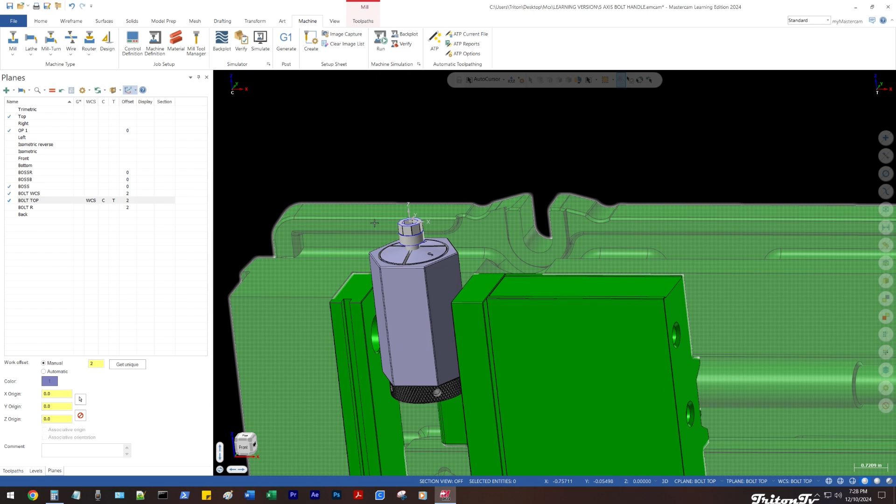And yeah, so now I'll turn on the rotated plane, and it's rotated in a certain way. I try to make my 3+2 planes rotated in such a way that they're actually how the machine's going to look. In this instance, I believe A on this machine would be positive. So anyway, I rotate it to where the y-axis would be pointing in y in the machine and the x would be pointed in x in the machine. You don't have to—post-processors and the machine control will take care of the kinematics there. I just like doing that because it helps me get a better understanding of what things are going to look like. So we're going to go ahead and turn this plane on.

And we're going to go to the op3 bolt. I just wanted to show you setup there. And I'm going to go ahead and turn off the 5C collet block and the vise because they're already selected, which I'll show you now.

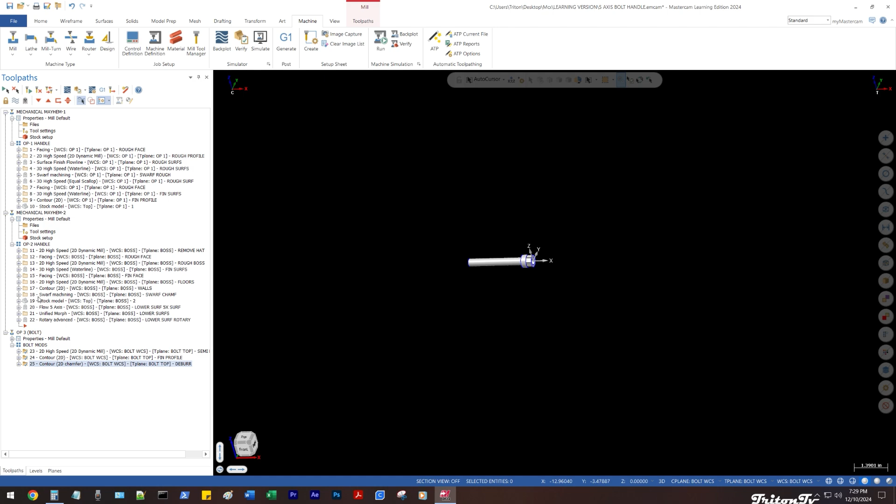Same thing, I had to move this setup as well, I believe. So we go to the stock setup. You can kind of see the red outline here—it's that solid that I showed you. And then in the work holding tab, we're using both of these.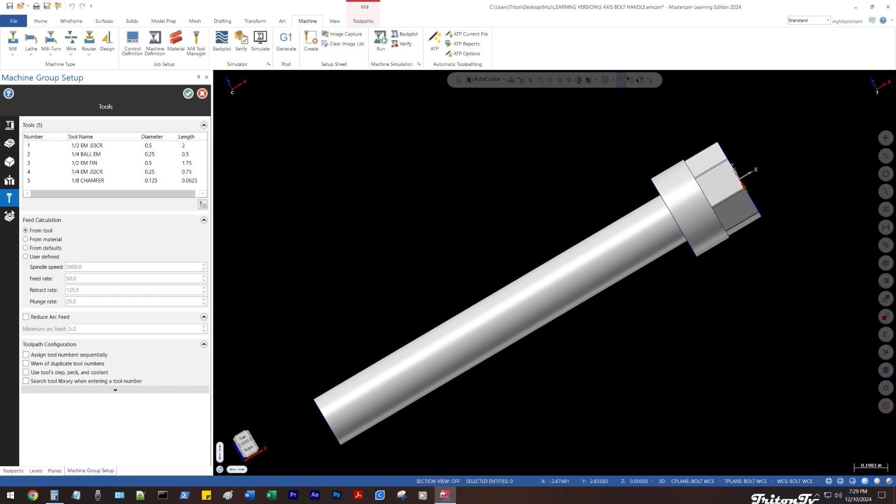Yeah, I think it's going to show them both. I believe so. And then I had to play with the X and Y values. A lot of times with these rotated planes, they're not the direction you think it is. Yeah, actually I had to move X, Y, and Z to get the vise where I wanted it to be. So that's where the measuring in the sim comes in handy.

So we're going to go ahead and step through these operations real quick. So this is verify. I'll just let it run verify real quick. Just like a little hex cutting there, chamfering, and that's it—just a real simple op is really all it was.

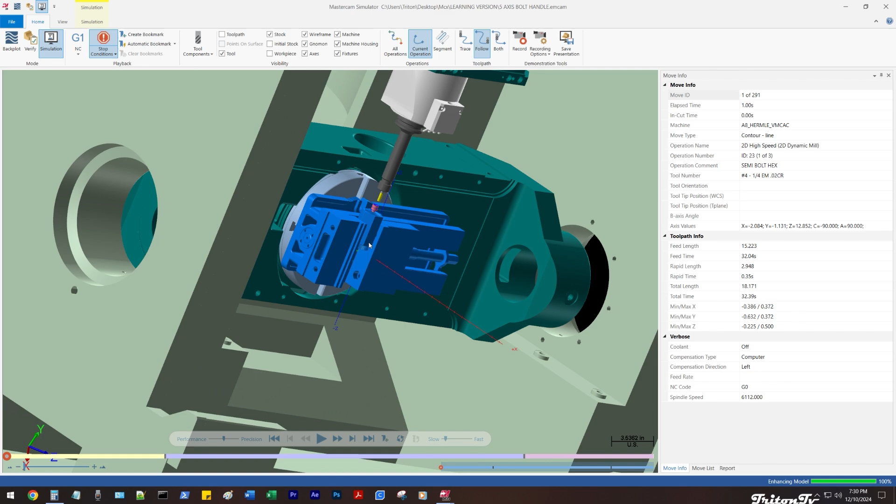Yeah, so we're gonna go ahead and go to the sim and just show how this would actually look in the machine if we had that same vise, and 3+2 stuff when you're doing stuff off the side of the vise. It's kind of nice to get it a little bit away from the vise. And I think I even grabbed a longer tool just to give myself more clearance here.

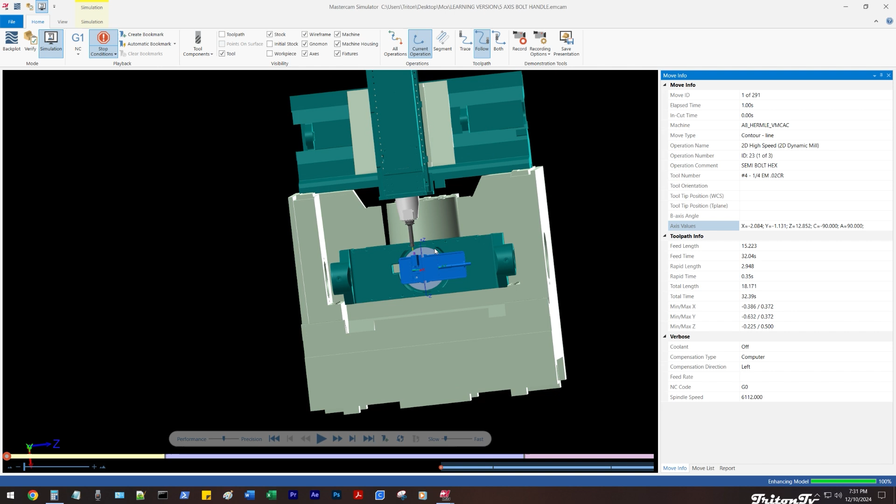So yeah, over on the right, you can see we're at some XYZ value. Yeah, so this is a positive. A good way to think about it is if you look from the positive to the negative of an axis. Let's go ahead and turn this off. So I'm looking, we're looking from the positive X to the negative X direction.

The tool has had to rotate around the part in a clockwise direction, or the other way to phrase that is the table has rotated counterclockwise to get the tool to rotate clockwise around the part. And that's why this is actually positive A.

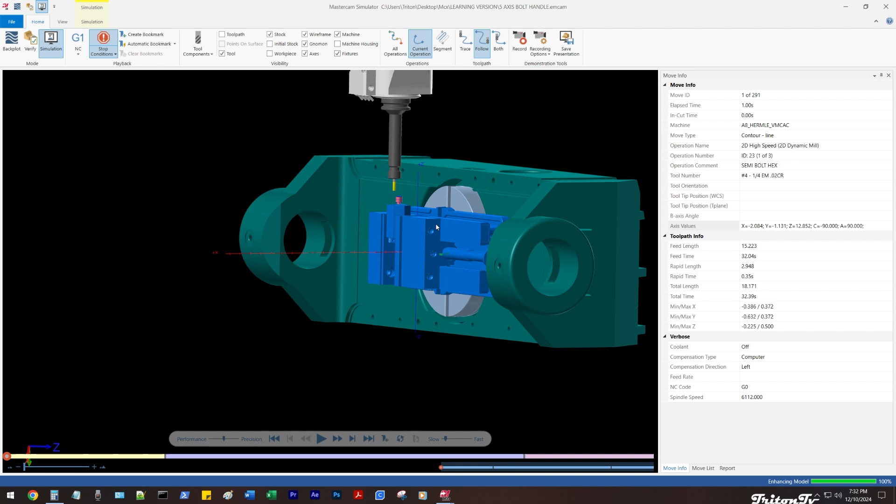It's one of those things with 5-axis that kind of confuses you when you actually really start to think about it and understand it. On most machines that I've ran, the direction the table rotates is actually backwards of how the tool ends up. And that's why the numbers make sense in the code, because the code cares about the tool, not the part. One of the guys who set up a DMG machine, he was like, don't think about what the machine has to do to get there, just think about where your tool's moving. I might have said that backwards, but you get the point.

So let's go ahead and step through this, and then I think that's going to be about it for this video. Just kind of want to talk about Unified, talk about the sim, talk about some setups and whatnot.

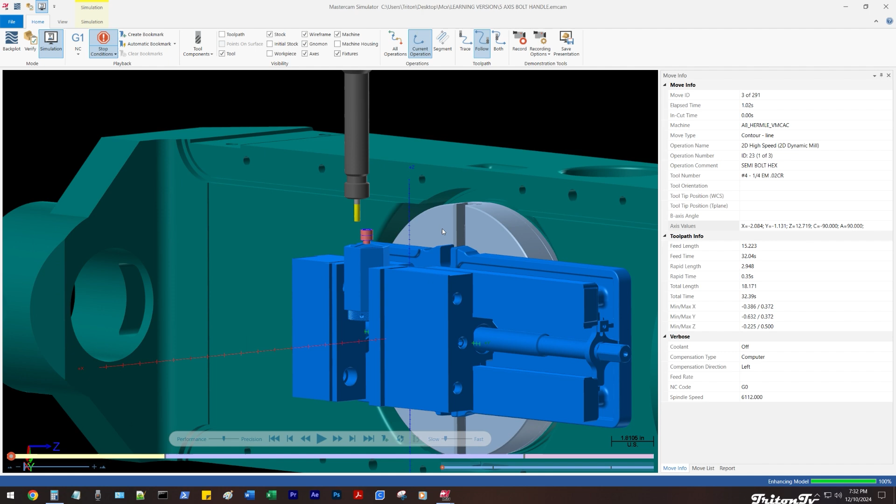So we'll go ahead and step through here, turn the housing back on, maybe make it translucent. And we'll just run through that, do 2D high speed, I believe. And then this would be a finishing of the hex.

And then we got a little chamfer here. Boom, and that would be op 1 and 2 done for my part. And yeah, the bolt here.

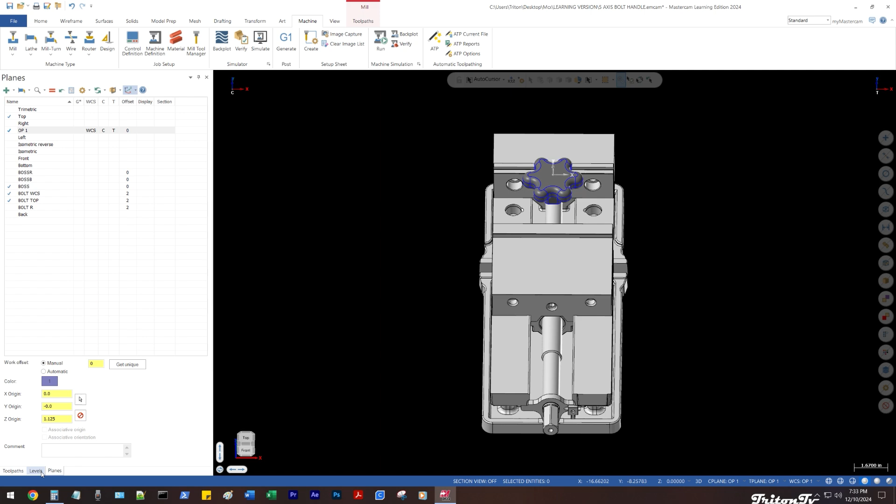So I'm going to kill this, pull back up the part, solid geometry. Let's go ahead and pull up op 1 maybe, and then let's pull up our op 1 plane and our maybe our op 1 stock wire. Boom. Oh, that's where it is.

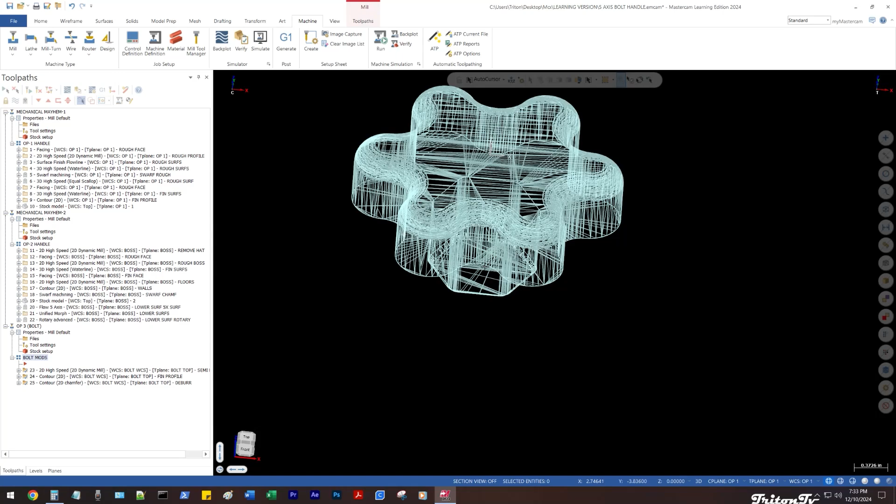This is that mesh. I don't know if you remember when I was talking about my stock setup for this. This weird green thing is very similar to an STL, it's like just a bunch of triangles. But this mesh was created from this stock model. Pretty cool. So yeah, there's this mesh. I don't know much about meshes, but I think STLs create meshes, I guess would be a way to say it, or an STL is meshes.

But anyway, I've kind of rambled on for long enough. I know this is kind of all over the place, but there's a lot to this software. There's a lot to multi-axis machining, and there's a lot to verification.

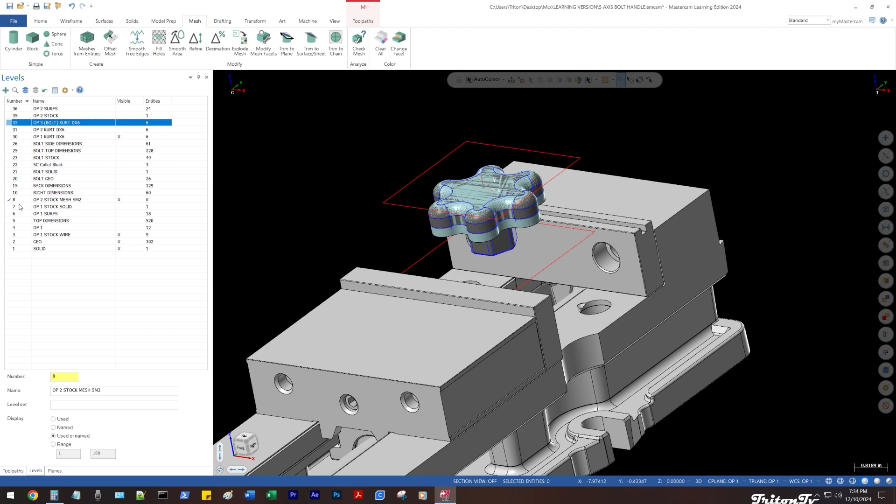You know what, we're going to create a new level. This is driving me nuts. We're going to create 8, we're going to call it op 2 stock mesh, and then I'll call it SM2, so it's stock model 2. And then this is going to be our main level. And what I'm going to do is select the mesh, right click, come over here, move it to the main level. Boom. So now I can turn this level off and I have exactly what I want.

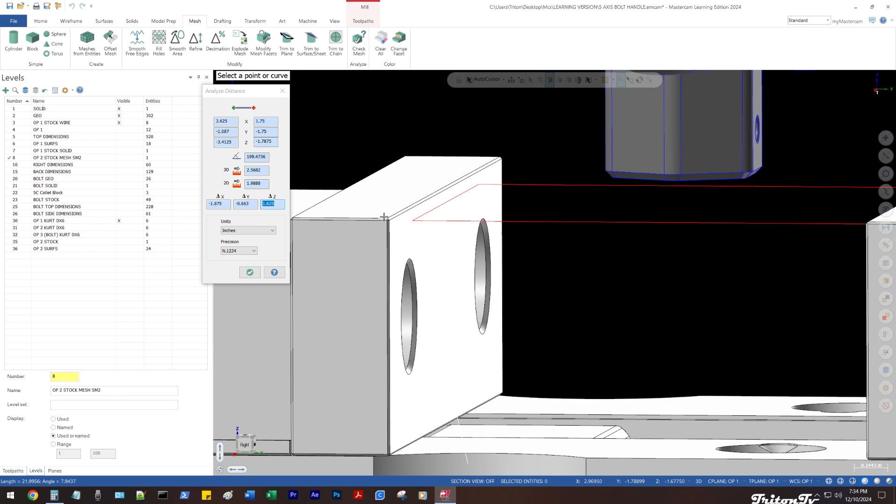So this was the initial setup. Screw it, I'll talk about this too. So this was a 1 5/8 parallel, which would leave us holding on to 110. Yeah, I'll talk about this part more in detail and what it actually is and actually show it to you in a real video.

But that's probably going to be it. This video is long enough for sure by now. So yeah, hopefully anybody who programs machining, or even if you don't program machines, you find this interesting. There's a lot that goes on in making parts, and we're expected to be really fast at doing this and setting all this up. And that's why my right click menu has all kinds of cool stuff that I use all the time that I don't have to go sorting through up here.

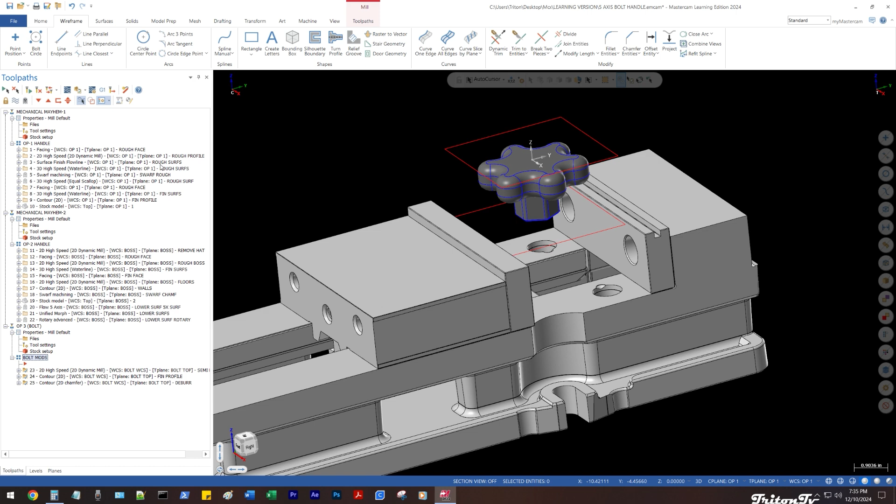I have this educational version on my computer. You can't spit out code, but it does have milling, lathe, mill turn, wire, router, design, blah blah blah. It has all the stuff, so I can maybe talk about creating tool managers and this and that.

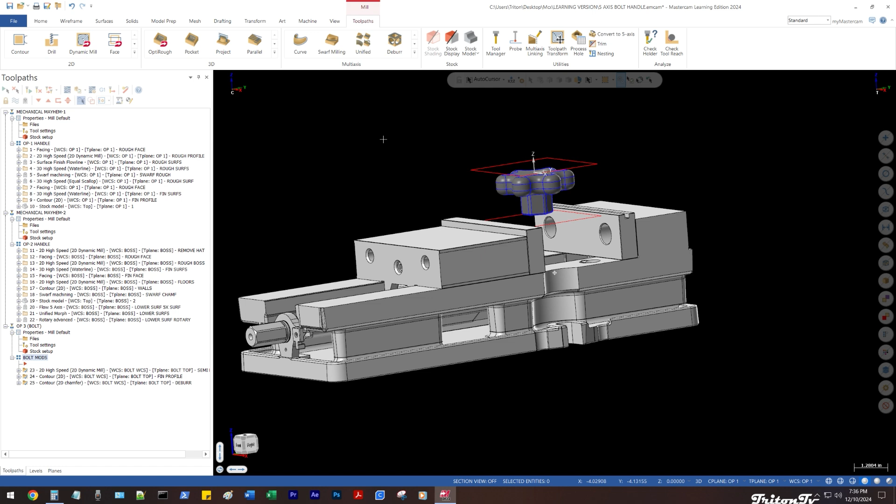Yeah, and just as a side note, I've been programming CNCs for about 13 years now. I've been using Mastercam the entire time, so I'm pretty familiar with the software and the changes over time. I like it, I think it's great software. It's got its bugs, it's got its nuances, but it's efficient at doing what it has to do. And toolpaths like unified and flow and all these other things are kind of another beast that you just end up having to tackle. So yeah, that's gonna be it.

I'm trying to find a good spot to save this at. Let's see here, let's just leave it like that. We'll go ahead and save it there.